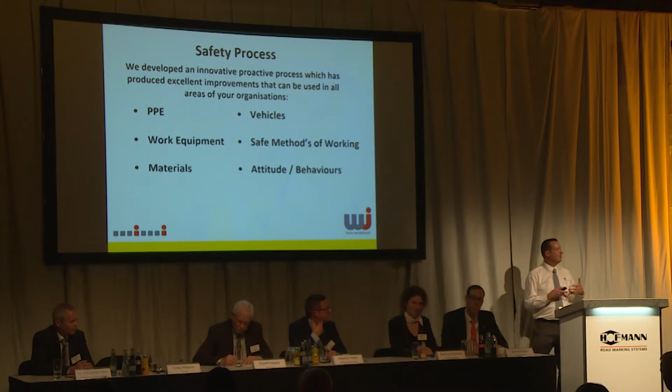I'll do an example for road studs. In the UK, we install a lot more road studs than we do in Europe. But what we've done is developed a piece of equipment called the Guardian, and I'll go through the process of how we developed it.

Work equipment - nobody's more qualified, as I've just been saying, than the people who are doing the job. If you can listen to them, show them that they're important, and create that feedback and partnership with them between the management team and the individual, you get the best out of it.

We engage with the workforce, we address their behaviours, we say how do we do the job better, how can we improve? We act on their ideas.

By acting on their ideas, we're giving them feedback. If they talk to us about how they think the process could be made safer, more efficient, we need to talk to them, get that information.

When we've got that together, we tell them what we've done about it. If we can't do anything about it, we'll tell them. If we've got good ideas and we engage with them, we take these ideas on board, and we feed that back to them - well done, you've really had a good input there.

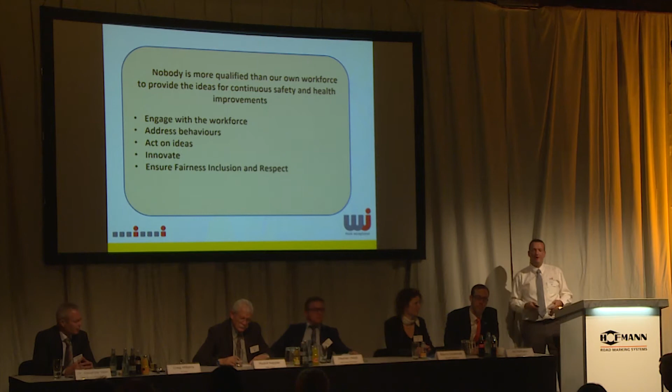Innovate, ensure fairness and inclusion and respect throughout our employees, and drive the initiative - a good medium for communication. That's what I'll go into now.

This was a safety system. It's a simple system, we're not too complex with it. It's all about a conveyor belt - you start at the bottom and you make your way up. I'll go into the ingredients that make the final product.

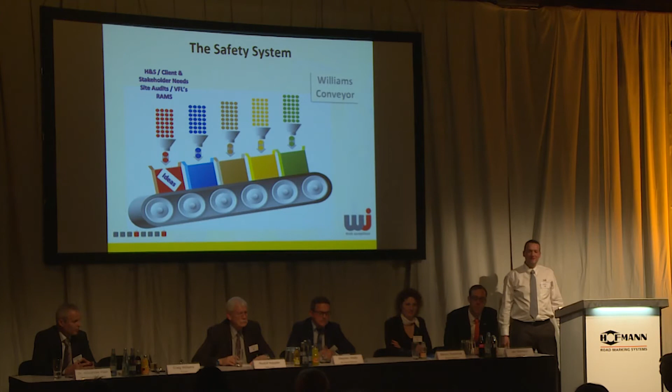So firstly, the ideas. We gain ideas from things like health and safety meetings, environmental meetings, client and stakeholder feedback, and what we call VFLs - that's where the management team go out onto site and spend time with crews, with the guys and ladies on the road, and gather that information.

And risk assessment and method statements. But the problem we had is when we first introduced it, we needed to find out the best way to get more out of it. Rather than it being a formal process, we needed to look at why people wouldn't come forward, why people wouldn't stand up and discuss things.

So we looked at the phobias in the UK. Number 7 on the list was thunder and lightning. Next was dogs - number 6, most people in the UK have got a phobia about dogs. Crowded areas - in the UK we don't like crowded areas. Heights and snakes. Does anybody know what number 1 is?

Number 1 is sociophobia - standing at the front, standing out from the crowd, standing up here rather than sitting down there. I've got sociophobia - no, standing out from the crowd.

So it takes courage to engage, and that's what we're saying with these people when we're talking to them out on the road, our employees. It takes courage to be in a group of people working and say, how can we do that better? How can we progress? I want to change something. And that's what we bought into at WJ.

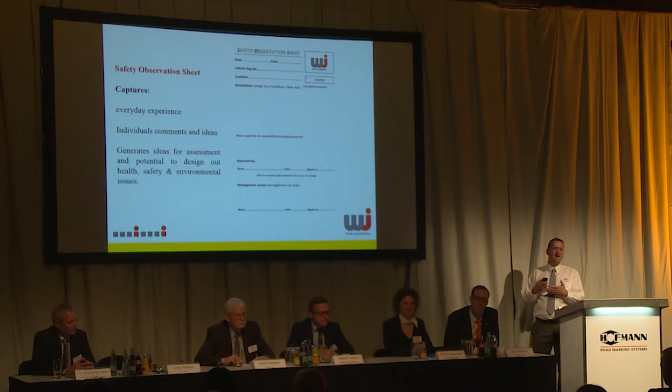So we also introduced the SOS system. The SOS system was a simple system to capture information. It gave the operatives and people out there the opportunity to write their ideas down, to publicise it, tell us what they thought could be improved and how it could be improved. It was a paperwork system originally. So what we did is we developed it into SOS at WJ UK.

Everyone's got a mobile phone. Everybody can take photographs. We had live information streaming in through the network and through emails, so we can sit in the office and see this stuff coming in as it happens. We can also act on it and use it for benefits and actual evidence to develop things.

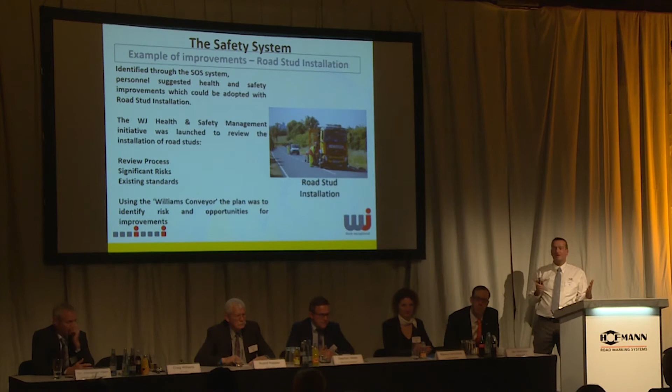The road's on what we call a stop-go, so the traffic will still be passing there under traffic control, but these people are still having to stand on the centre line.

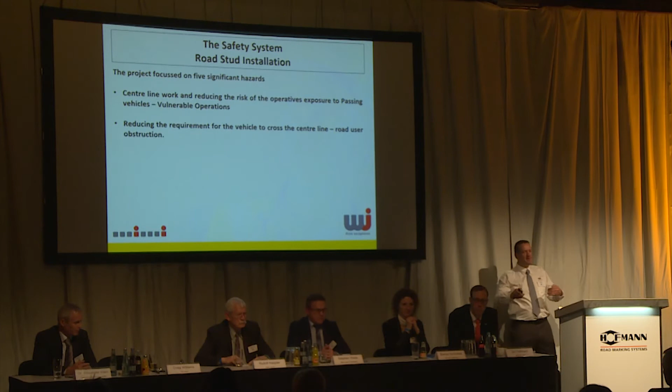So the project focused on these 5 areas: centreline working, which I've just discussed, reducing the requirement for vehicles to cross the centreline. If we can keep the vehicle away from the centreline, then we're not making it very tight when other vehicles are crossing. We're not restricting the crossing area when they're passing our workers.

Reducing the operative's exposure to debris. When we're doing milling operations, we're using a milling head, which cuts through the road surface to create the cavity. This can fire out stones, dust, particles. How can we reduce that?

Minimising the exposure to handling hot materials. When the casting's cut out in the centre of a road, we pour bitumen in there, which is possibly about 180 degrees before we put the casting in. People having to still handle that.

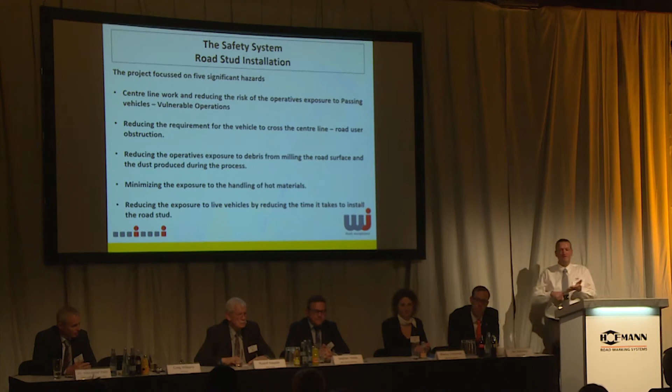And reducing the exposure to live vehicles. That's the main thing. That's why we're here today. We're thinking about the safety of the individuals and the exposure that they have.

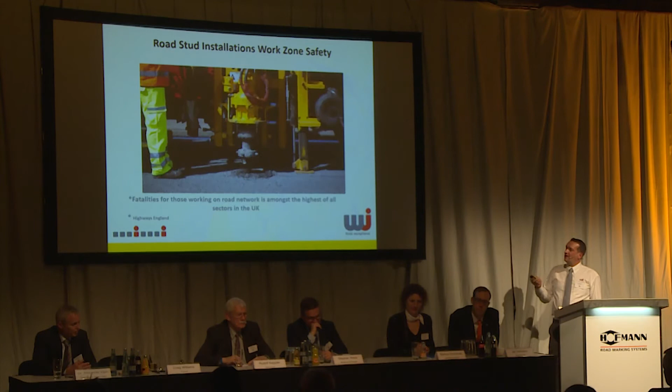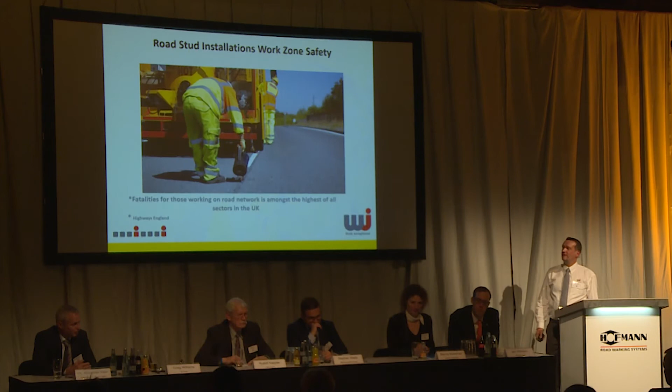Milling out the hole there, there's your debris, and then hoovering it up. Again, vehicles could be passing along this side here. Putting the pitch in, and then installing the road stud. Very simple process. It's time exposure on it, exposure to the road, hot materials, dust.

So we go back to the safety system. We look at the management review. We look at the benefits. What can we benefit? The things I've highlighted, I think, if we can benefit by improving any of those things, we'll be getting a real good product at the end of it, a final improvement in the road, the way we operate. So we develop it.

What we use is we've got at Elland, which is in Yorkshire in England, we've got a development team there. Some of them are over there. They won't come and stand up over here because of sociophobia, but they're sitting over there smiling to themselves.

The team here, they developed the Guardian system, which is an automated system to install road studs, which I'll go into further. We use CAD systems to develop it, so we're not manufacturing products, we're not creating waste or spoil or wasting time. We're using the computer-aided systems to evaluate what the capacity of the equipment is.

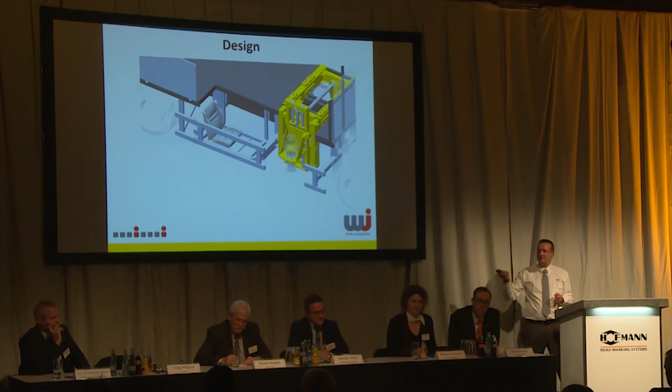And we use the workforce for the improvements. They're the driving point behind all of this. So that's an example of one of the designs we put in with a sitting area, which is taking people off the road. That's another example of the drilling head.

Well, this is the head, the extending drilling head. What we had to look at there is we wanted the vehicle to be sitting at one side of the road and then be able to extend out to work on the centre line, like so.

The problem we had there was the downforce and the pressures used to drill that hole was causing the whole unit to lift up, so we had to put extra supports into it to support it.

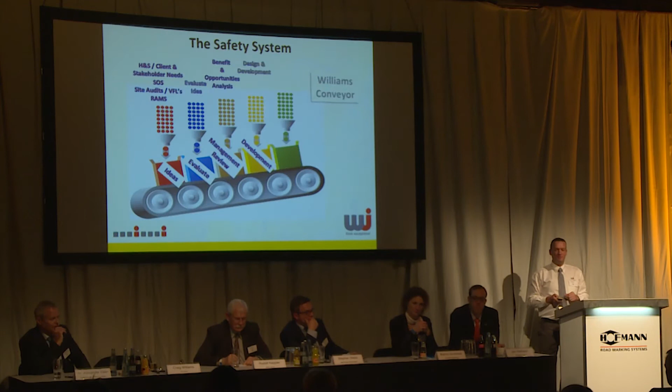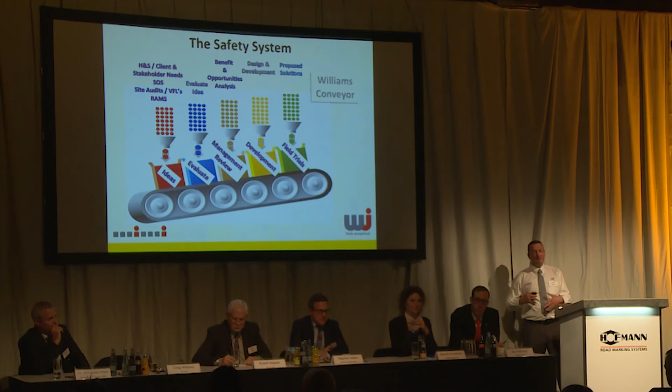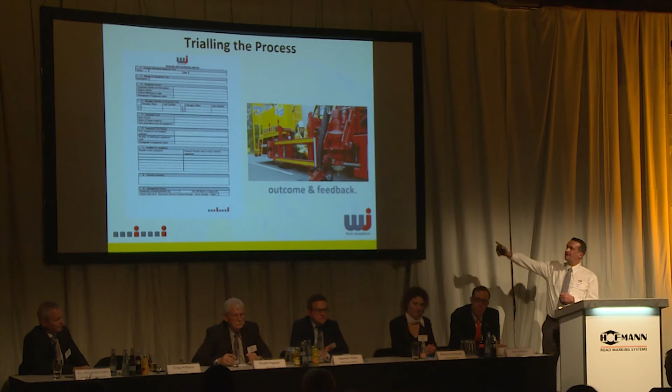Then we'd go on to field trials. What we do is send the vehicle and equipment out onto the field. We trial it with a prototype vehicle, and we get feedback from the individuals doing the tasks, so we can see if it's working or not. If it works, great. If it doesn't, we have to feed back and put it through the process again. That trialing process was the outcome of feedback, and the machine we developed took people off the road.

Let me show you how these things have developed now. Firstly, we've got working on the road, which I showed you the photograph of before. Here's how we do it now.

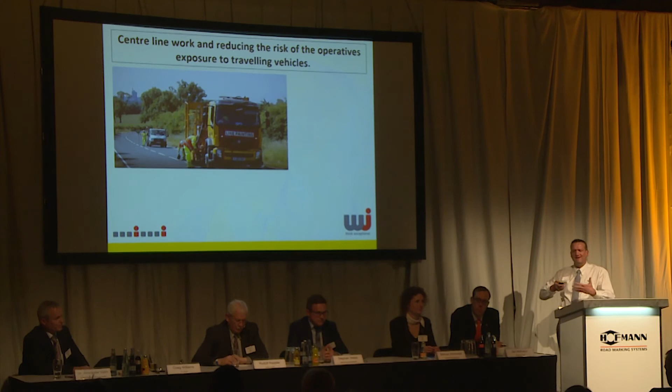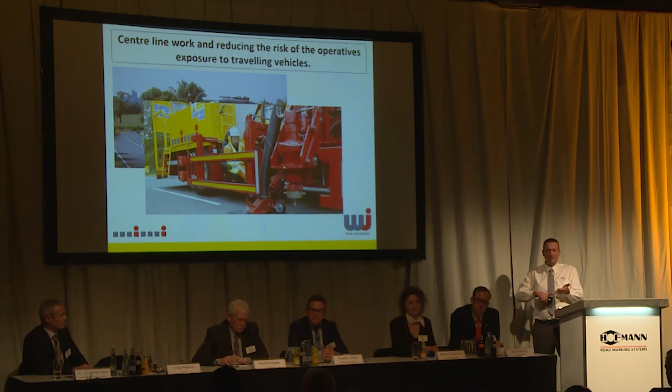This is how we're going to be doing it in the future. This is a prototype vehicle - we've built one and we're building another 2 at the moment, where it takes people off the road. That guy sitting in that vehicle can do all the jobs that used to take 3 men to do, 3 men exposed on the road network, and obviously handling hot materials.

We looked at the drilling process. You've got the milling head there, and the hoovering of it. On this process, you've got the drilling head, which is automatically controlled, and behind it you've got a hoover which sucks away any dust, and then the vehicle pulls forward and sucks and clears all the spoils.

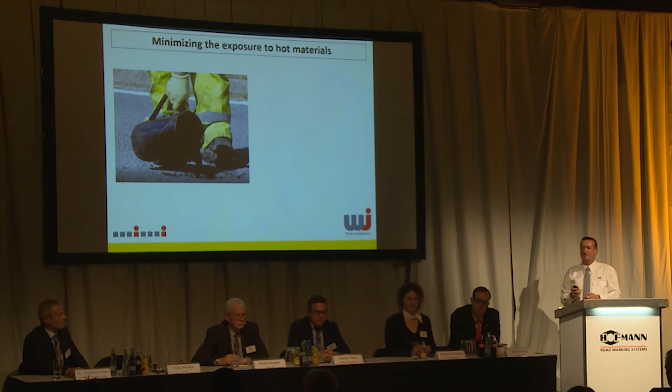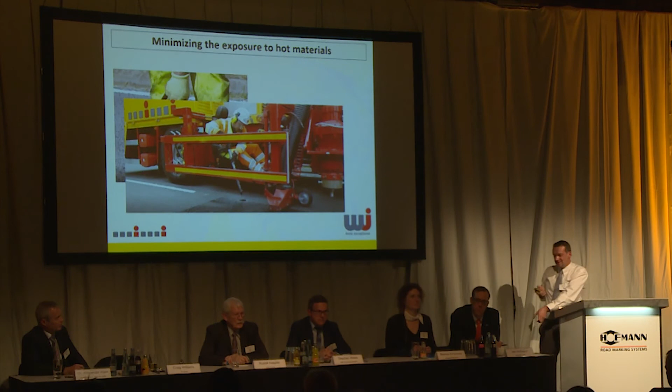Hot material is a massive problem, between 180 and 220 degrees. Any spillage - you're carrying jugs of this around - so we needed to minimise and reduce the risk there. What we did was create a lance. The lance has got a pumping system that pumps the hot bitumen, and he basically sits there and drops it into the hole so he can prepare and put the stud into place.

When we developed the milling head, we thought we were taking too long to cut out the hole, the cavity for the road stud. If we could reduce the time there, we could improve the process and reduce the exposure. So we actually changed it to a drill - a drill bit would go in there instead of cutting out a large area. It's less road damage, less dust, less impact on the road surface, and less spoils.

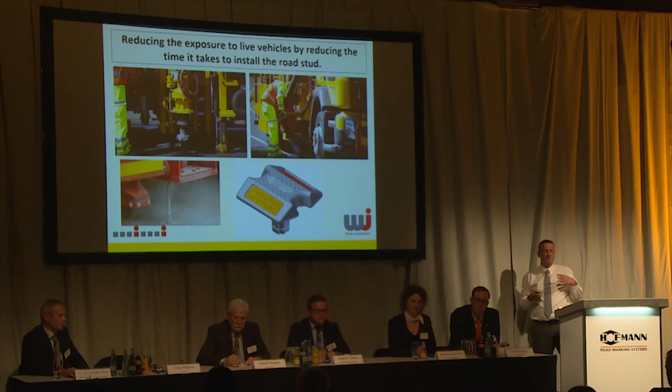What this then led to, again through the SOS process, was the development of the Alux stud. We developed the Alux stud over the last 2 years, and it can be put into that cavity, the hole that's drilled, without cutting out a large cavity. So it can be very easily removed if it damages or wears, without damage to the road surface. And the time element is massive - there's a huge saving on time.

That's the Guardian machine as it was running there. I'll just show you a video of the Guardian machine we're working on, the prototype, and how it is developing.

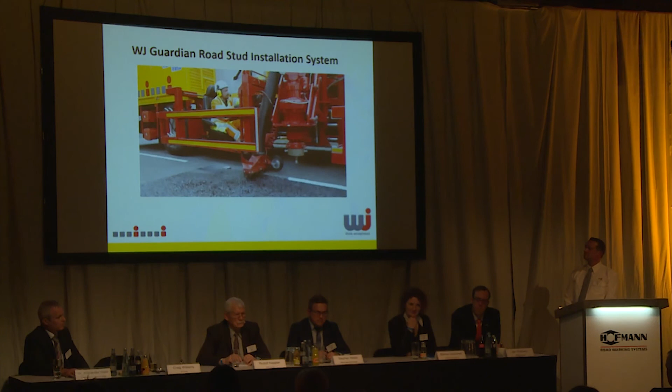A workforce-driven safety culture is what we've worked and we're proceeding with. We use the SOS system, which I've discussed with you, and health surveillance of the workers. We look at their mental health and their physical health, with regular surveys that we do with them and work with them.

We have health and safety competency training, so when people change jobs or skills, we train them to make sure they're safe and doing it the most efficient way. We also have management site audits - we involve the management team in site audits looking at health, safety and environmental matters. They get their high vis on, go out there and interact with the crews.

That's my statement at the end: by acting on innovative ideas from our workforce and supply chain partners, we can work safer, and I truly believe in that. Thank you very much for your time and help.